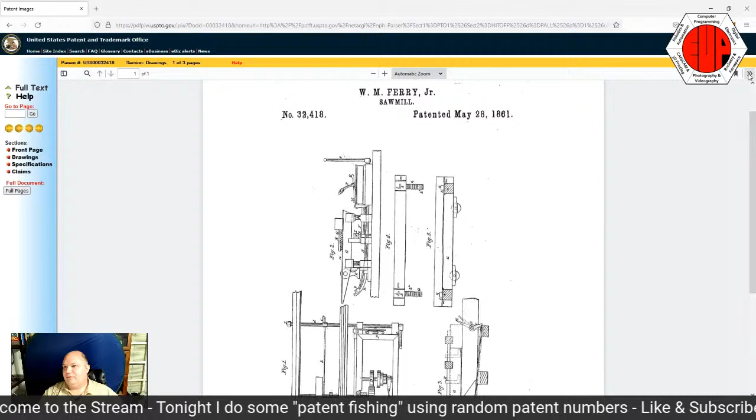Ooh, a sawmill. It's a little crooked. Got some belts with variable speeds, pulleys down here. All right, well, it's a sawmill, but let's go see what the actual claims are. So obviously, he wasn't the first to patent a sawmill in 1861.

Let's see here. Throw on the highlighter. William M. Ferry Jr. of Ferrysburg. I wonder if he owned the place. Useful improvement in sawmills. Plan of the sawmill with my improvements applied to it. A head and end view, longitudinal view.

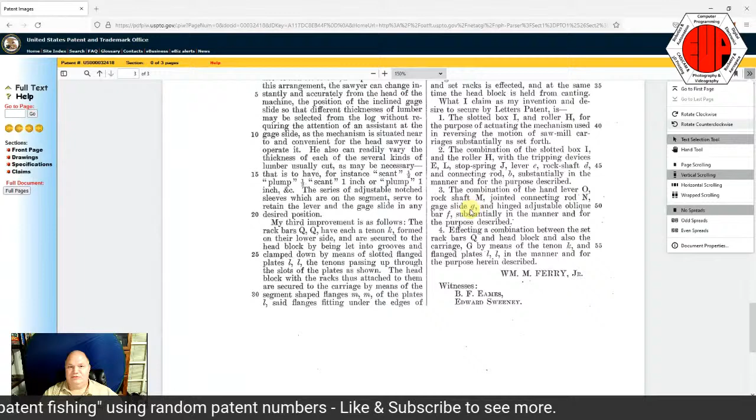So this is generally the long-winded explanation of the diagram or diagrams. And sometimes that's fun to look through, but usually the meat of the matter is down here at the bottom, the actual claims. So these are the things that he claims are unique to his patent. The slotted box and the roller for the purpose of actuating the mechanism used in reversing the motion of the sawmill.

Well, I mean, first reversible sawmill, that's what he's claiming. Hand lever this, jointed thing that. If we find something small enough that we can take the patent design of, clearly long out of patent, we might do a 3D printed version, but this looks a little complicated for making a 3D printed version.

All right, well, moving on. Let's see, patent number 485-510. Boop-a-doop-a-doo.

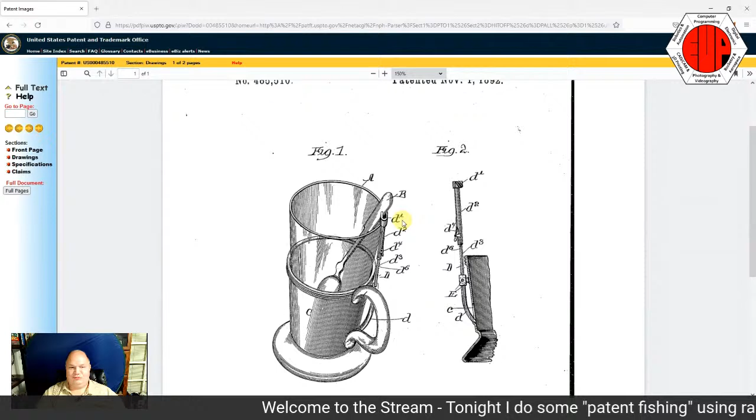All right, a spoon holding attachment. That's right, just in case your spoons were falling into your cups too often. Here's a way to attach your spoon to your cup. How convenient.

Let's see here. Be it known that Joseph so and such, a citizen of the U.S. and so on, as the following specification, invented a certain new and useful improvements in spoon holding. Who knew that there were old and not so useful improvements in spoon holding? But that's pretty much the standard language for all of these.

Oh yeah, more especially at soda water fountains and similar places where a spoon is often used to serving different drinks. That makes a little more sense. Commercial spoon holder. Illustrated in the drawing based on the two figures. Oh well, this is pretty small, one-page patent.

Combination of the holder C, a lateral arm D, extending upward there from sufficiently to reach the top of the glass and terminating an overhanging fork D prime. Open laterally in a position to receive a spoon as it slides along the interior of the glass, so substantially as described.

So pretty much just this little add-on piece here. And it's got some sort of clamping mechanism, if you will, to hold on to the spoon. It looks like a little spring-loaded clamp. Well, I guess that was a problem for soda water back in 1892.

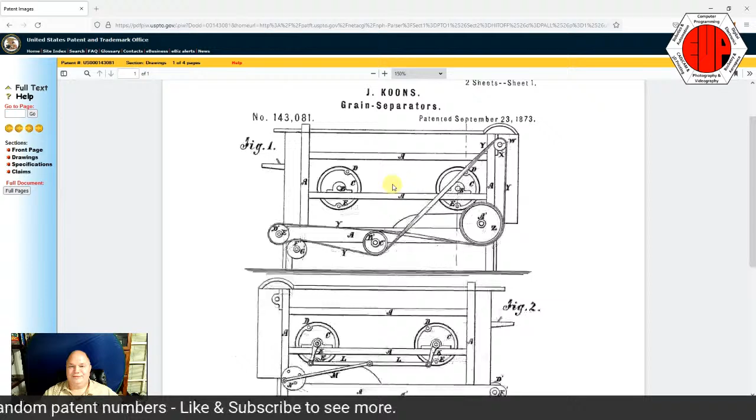Moving on. Patent 143-081. You never know what you're going to find, folks. Grain separators. So a mechanical system of separating grains in case you accidentally got them mixed up. Let's see, or is it the wheat from the chaff kind of separator? There's a little control lever.

Various platforms. All right, let's see. Joseph Koons of New Auburn in the county of Sibley, state of Minnesota. Oscillating grain separator. Arrangement of the belt and pulleys, driving the various parts. Similar letters of reference indicate corresponding parts.

If I had a purpose for separating grain, I might try and build one of these, but I don't. Let's see. Where's his claim start? So if you get an old enough patent, the claims aren't in the same place. It's not the same layout. Looks like 1873. It's not.

Ratio between the horizontal and vertical movements of the rack and connector may be regulated at will. This adjustment enables the forward movement of the straw to be accelerated and retarded as required. A rack having the movement herein described may be used in connection with an endless canvas apron.

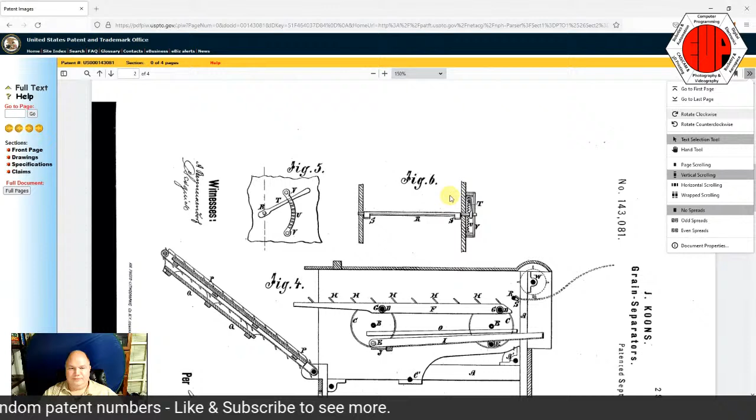All right, just a little. Turn this clockwise here. Looks like you feed everything in one way, and these shake and vibrate to produce two different outputs. Alrighty, moving on.

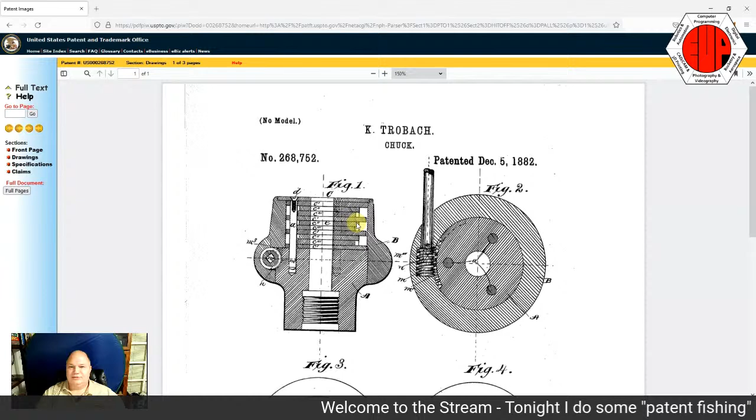A chuck. Hey, chuck. Is that a 3-jaw chuck for a lathe? Interesting little lobe shapes you got here. Kind of pinch in the item.

All right, let's see what the claim is. Oh, looky here. Konrad Trobach, subject of the King of Prussia and German Emperor, residing in Berlin. Although this is the U.S. Patent Office, anyone from all over the world can file a patent. Improvements in chucks to be used in lathes, boring, or similar machines for holding and gripping pieces of work and other purposes, with the accompanying drawings.

Yeah, it does look like a head of the block, having 3 or more recesses for the reception of a corresponding number of tightly fitted guide pins. The worm catches on the worm teeth, and the corresponding hole in the ring B. So yeah, lever plates. So it looks pretty much like that.

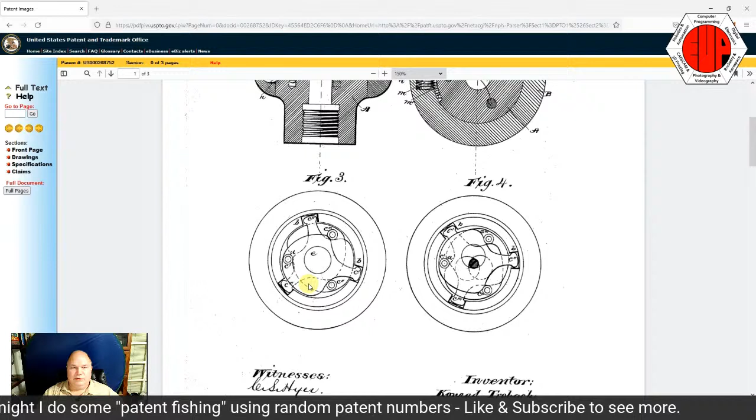So this worm interacts with the worm gear here, rotating the intersection, and by rotating these various lobes, you get sort of a neck tightening action on the center there, as each one of these are moved from this position, the open position, to the closed position. You know, I suppose this doesn't look like it.

It does have a little bit of a flaw here, because depending on the circumference of the hole in your lobes and the circumference of the thing you're trying to hold, you're really only contacting the thing you're holding by a very small surface where these circles are tangent to each other.

See if it's 3, or it actually looks like it could be a whole number of plates. 3, 6, 9 plates. With that many plates, you might actually get a decent grip. Interesting little way of locking it up sideways. All right, there's your lathe chuck. Moving on.

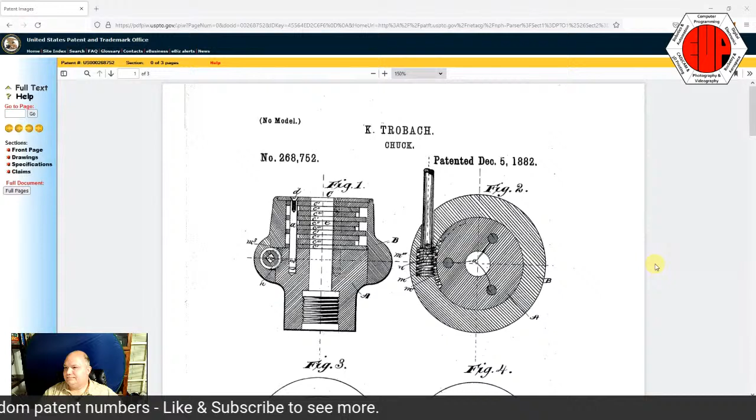Talking to myself. Just talking to myself. It's a little bit weird.

Here we go. Patent number 824058, a condiment holder. All right.

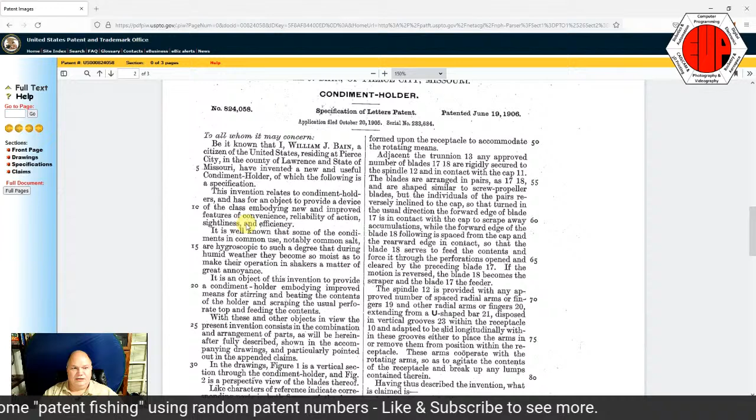Full pages. William J. Bain of the U.S. New and useful condiment holder. Condiment holders, and is for an object-provided device of the class embodying new and improved features for convenience, reliability of action, sightliness, whatever, and efficiency.

Improved means for stirring and beating the contents of the holder and scraping the usual perforate top and feeding the contents. All right, well that kind of makes sense. You got a number of little bars that twist. Oh, there's the hand crank. Missed that earlier.

Yeah, turn the hand crank, keeps all your salt. This actually might be something we could print. I don't know how terribly useful it is, but let's set this one aside and see if we can print one. It doesn't show what it looks like from above, but I'm assuming it's a cylinder, and we can probably use these images to bring them into CAD.

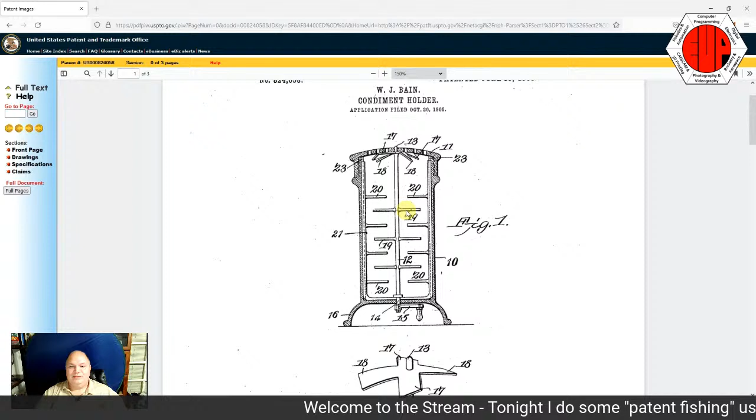So that looks more like a fan now than a cutting blade. He has all sorts of specific details as to all of that. Let's—which one's this? Let's keep this one aside. 824.058.

Just putting a note down real quick.

Condiment holder - what is it called? Yeah, condiment holder. Well, that one's printable.

It's not really clear whether these are just bars or plates. I think they're just bars because I'd imagine it's meant to keep it stirred. And how many of them, if we were looking down from above, would there be two others sticking out the other way? Let's see, they're 19 and 20.

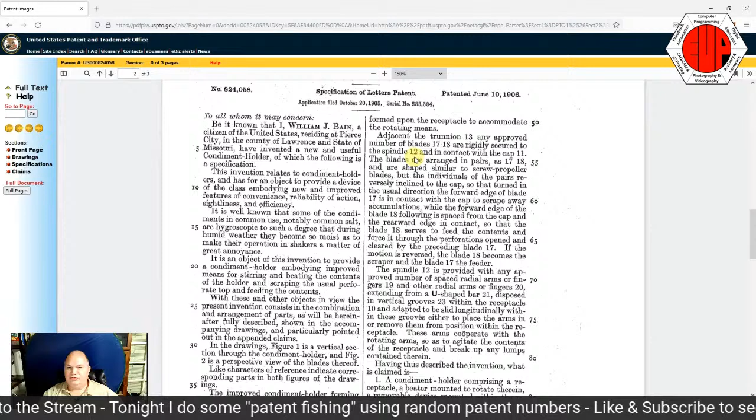Adjacent the trunnion 13, for any approved number of blades, 17 and 18, rigidly secured to the spindle 12 and in contact with the cap 11. Blades are arranged in pairs as in 17, 18. Oh, these are those blades. So whether you need 4, 2, 6, he's trying to cover his bases.

Similarly shaped screw propeller blades, but individuals of the pairs reversely inclined to the cap so as to be turned in the usual direction. Forward edge of blade 17 comes in contact with the cap to scrape away accumulations, while the forward edge of blade 18 following is spaced from the cap and the rearward edge in contact, so that blade 18 serves to feed the contents and force it through the perforation. So that's what he thought was all sort of unique.

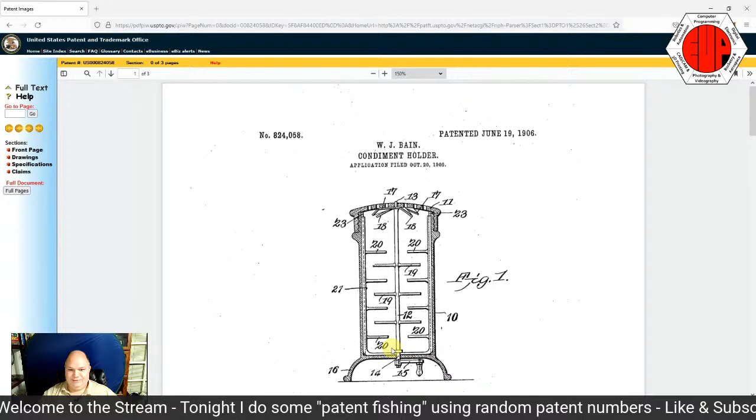So while this edge is scraping, these edges are pulling stuff in, almost like a pump I guess. Yeah, we'll save that one. Maybe we'll make that one. That one doesn't look too difficult. And we're moving on.

Obviously these patents are all old, and I chose that range because the mechanical ones are much more interesting to look at than the computer or electronic ones. Variable speed transmission gearing.

There's a valve mechanism for the piston. All right, variable speed transmission gearing, Mr. Thomas Churchill, subject of the King of Great Britain.

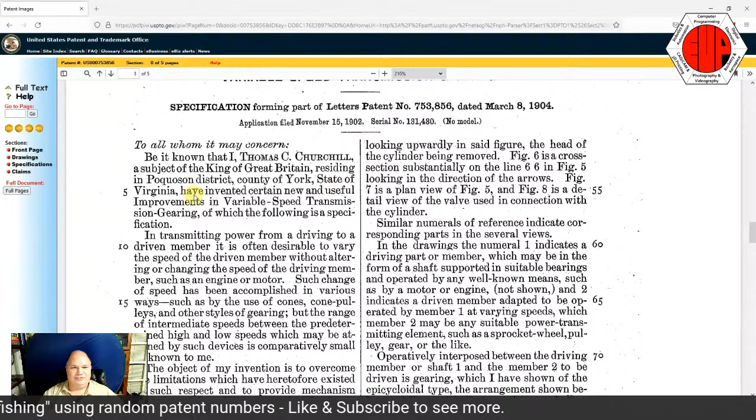Subject of Great Britain. How old is this? 1904. So he's a subject of Great Britain, but he's living in the state of Virginia. Certain new and useful improvements in variable speed transmission gearing, of which the following is the specification.

Various gears and shafts and keys and so forth, collars. Where's your claims? What's your actual claim here? Oh yeah, this is a long one, it's got pages. Here we go.

From the foregoing it will be apparent that by opening and closing valve 24 more or less, the speed of rotation of member 2 may be readily controlled, said member being at rest when the valve is fully opened, and full speed when it's closed, rotating at any desired intermediate speed controlled by the reciprocations of piston 7, consequent to resistance to the rotation of gear 4. So yeah, looks pretty complicated.

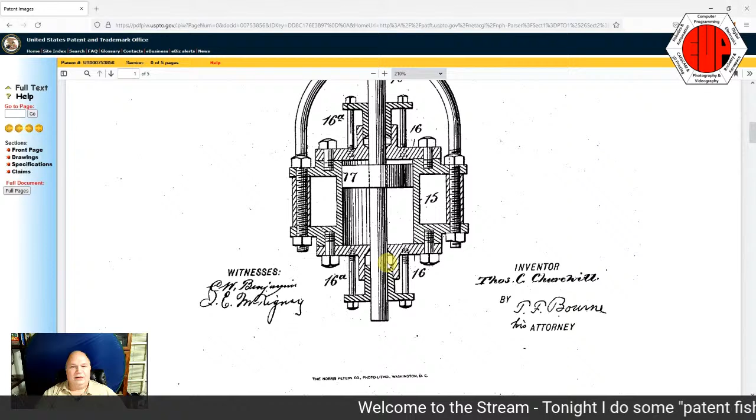So this controls... interesting. So the idea is that your pulley - this is again cross-section - this is turning towards us, and that's causing this part to go up and down, piston to go up and down. And the amount at which the air is allowed to travel from one side of the piston to the other creates resistance and thereby slows down the speed of the wheel.

Basically just burn off the energy. Sure, you get a slower speed, but you've also wasted a bunch of energy by turning air into heat. Simple enough idea though - nice continuous amount of adjustment with no significant gearing. Might be interesting to make that, just for giggles, though I don't know what I'd use it on. Moving on.

Oh no, they're going to demonetize me for singing a song.

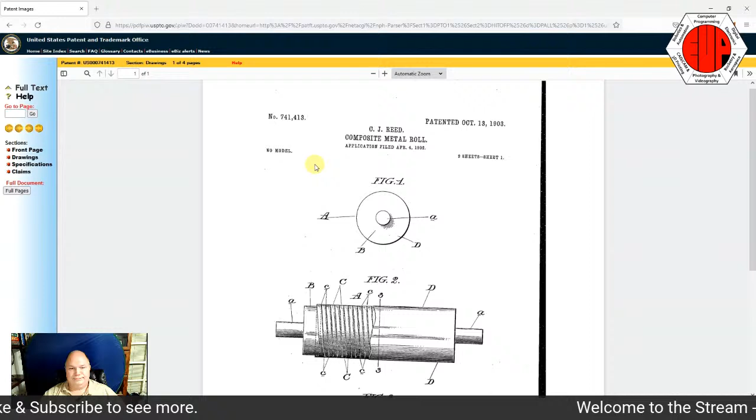Composite metal roll. Well, that's boring. Come on. Yeah, okay, it's a roll made with different types of metal and thus is a composite. Not terribly interesting.

Let's see what we got here. Looking good so far. Let's see. Oh Jesus, taking forever. All right, yeah, it's behaving.

And I just got to make sure things are going. Moving on - composite metal roll, you're boring, Mr. CJ Reed. Where are you from though? Let's just, for giggles, let's see where Mr. Reed is from. Philadelphia.

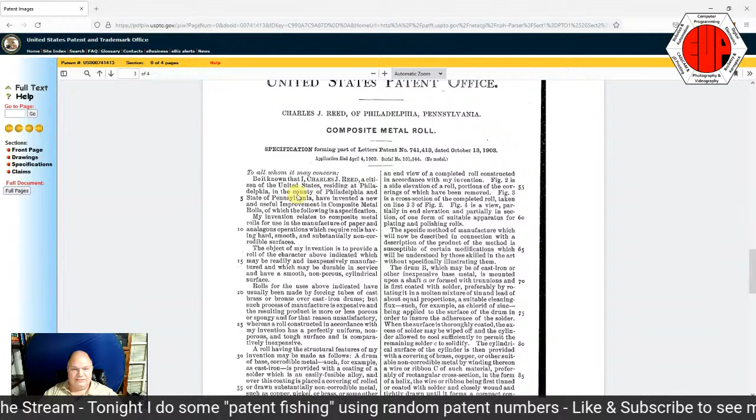A new and useful improvement in composite metal rolls. Ooh, sexy, sexy stuff. Indicated here, usually been made by forcing tubes of cast brass or bronze over cast iron drums, but such a process is expensive and the resulting product is more or less porous or spongy. Yeah, that's the last thing you want out of your metal rolls is being porous and spongy, I gotta tell you.

Moving on. Doodly-dee, here we go, what could it be? Patent from 1911, 997,195 - two-cycle gas engine. Well, that's interestingly different. Mr. C.F. Jenkins, two-cycle gas engine. Looks like a pretty complicated piston, various gas ports, got yourself a spark plug.

Jenkins of Washington, District of Columbia. Certain new and useful improvements to the 2-cycle gas engine.

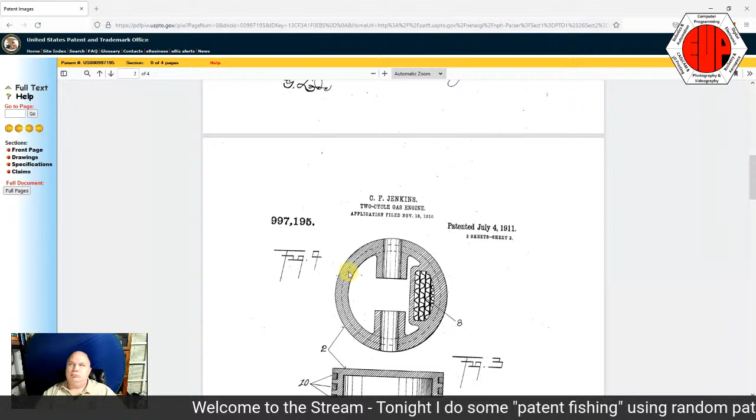A 2-cycle engine, by comparison, draws in all the gas. It draws in the gas, and while it's drawing in the gas, it's also exhausting whatever may already be in there. Then it's going to compress that gas, and it explodes, and the explosion is pushing the piston down. It actually evacuates the cylinders and also draws in more fuel, so they're less efficient.

And these are typically the engines that you would have to add oil to the gas to keep them lubricated. They're inefficient in gas usage, but they're efficient in design, in the sense that they're much more simple to build. In a lot of cases, as it looks like here, there's no actual valve train, so you don't have a separate cam opening and closing valves. The valves are open and closed based off of the position of the piston.

So this looks like the exhaust port here. And so once the piston is pushed down in the power stroke, the exhaust is allowed to escape. And actually, it looks like right in this area of the piston. Yeah, so in any case...

2-cycle engine. Let's see what his actual claims are as to what his improvements are.

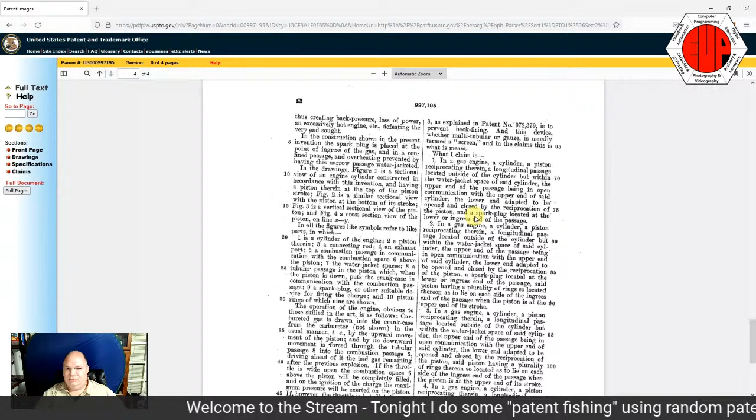Claim 1. In a gas engine, a cylinder, a piston reciprocating therein, a longitudinal passage located outside the cylinder but within the water jacket. Upper end of the passage being open communication with the upper end of said cylinder, the lower end adapted to be opened and closed by the reciprocation of the piston, and a spark plug located at the lower end or ingress end of the passage.

And then this is the way claims go. First I claimed it was a gas engine, a cylinder, and a piston reciprocating therein. Now it's in a gas engine, a cylinder, a piston reciprocating therein, a longitudinal, everything I said before in claim 1. Pretty much. Let's see, where does it become different?

Said piston having a plurality of rings so located thereupon as to lie on each side of the ingress end of the passage when the piston is at the upper end of its stroke. So basically what he claims is a 2-cycle engine with a piston designed thusly, with the holes thusly. Now all of that, but with rings, such that one set is above the ingress air and another set is below the output air, the exhaust, etc.

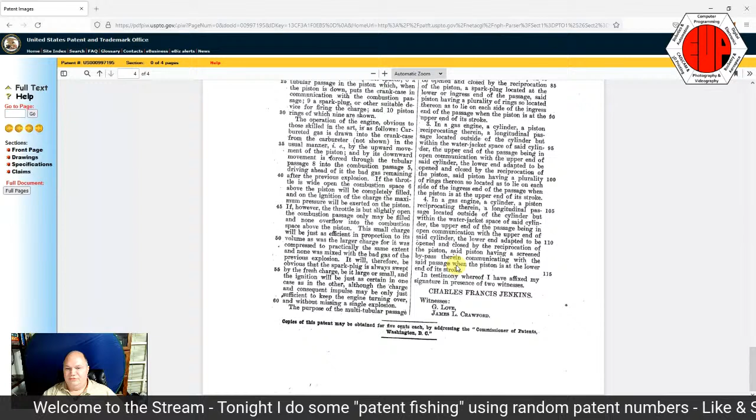So it gets a little repetitive in a lot of the claims, since they sort of restate what the first claim is in each one. So even here, claim 4: in a gas engine, a cylinder, a piston reciprocating therein, and so on and so forth, and so on and so forth. A screened bypass therein communicating with the said passage, with the piston in the lower end of its stroke.

Okay, well, he made a new gas engine with no valving. It might be useful. Not something I can build on a 3D printer, but let's keep going.

Moving on. Oh, not page number. We never know what we're gonna get. Doodly-dee. Ooh.

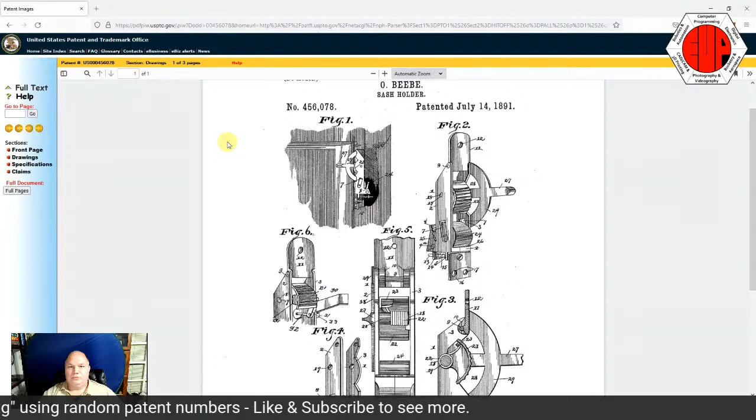A sash holder. As in a window sash. Well, that looks awful complicated for holding the window sash up.

Let's see. Sash holder. Mr. Oscar Beebe, citizen of the U.S., state of New York, new and useful sash lock and holder, of which the following is a specification.

Lock and holder, fairly simple. Other objects and advantages of the invention will appear in the following description, and novel features thereof will be particularly pointed out in the claims. Yeah, that's pretty much what you do in a patent.

See, look through a few dozen of these and you'll see quite the pattern. So, skipping on down to the claims.

Claim 1. The herein described combined sash lock and holder consisting of an oblong housing terminating at its lower end with a seat and having its opposite sidewalls provided with inclined slots and a roller seated at the seat and having trunnions, again with the trunnions, extending into the slots, and shafts and so forth, segmented cam, so forth and so forth, coiled spring, segmented shaft.

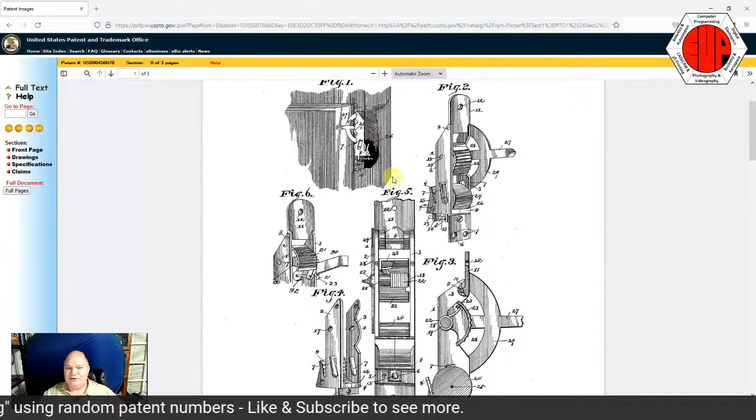So basically what it looks like is we have this sort of pushed-out mechanism, built into the wall. By turning this lever, you extend this friction brake out against the sash, and that helps hold it up.

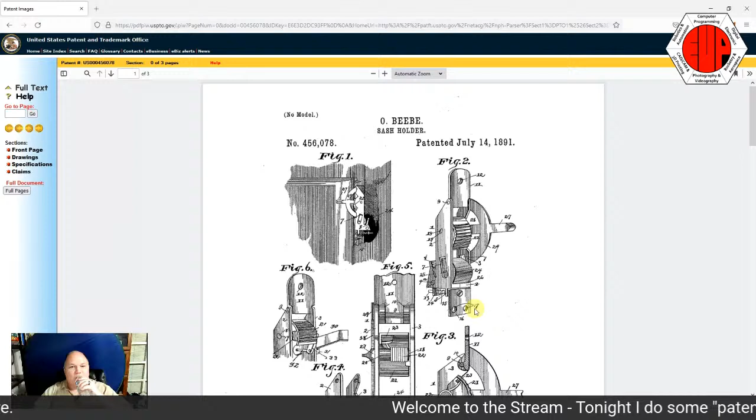Well, I remember in our old house we had really long lead weights, maybe twice as long as this water bottle, though it's probably bigger in my memory. They were lead weights inside little pockets on the side of the window, so when you lifted the window it was counterweighted with a rope and pulley, which seems a lot easier than this complicated mechanism. So anyway, moving on.

Doodly-dee, let's see what we can find next. I gotta come up with a new song in my head. A saw swag. Saw swag? Swedge?

Let's see, we got some ratcheting teeth here. Got a little handle. Oh no, not ratcheting teeth, that's the saw blade. Let's see, looks like it would go on the saw blade. Is this to alternate the teeth a little, or sharpen them? I'm not particularly sure, let's see.

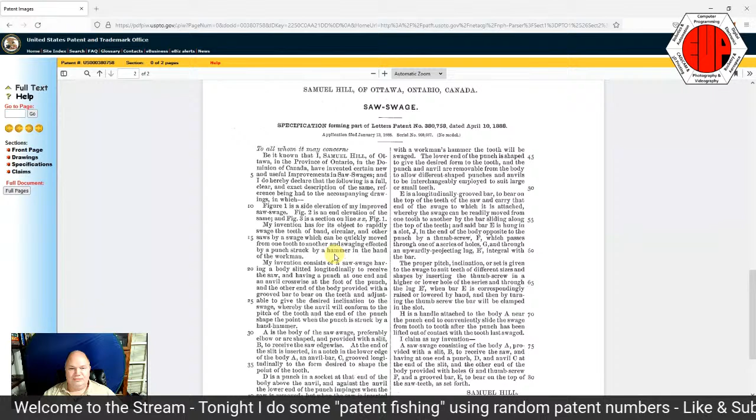Full document: Samuel Hill of Ontario, Dominion of Canada. Certain new and useful inventions, saw swage. Following full and clear disclosure, side elevation of improved saw swage. My invention has an objective to rapidly swage the teeth of band, circular, and other saws, can be quickly moved from one tooth to the other. Swaging is effected by a punch struck by a hammer, in the hand of the workman.

Alright, so like I thought, the swagging is where every alternating tooth, instead of having all your teeth lined up on your saw, you have them a little bit offset like this. That way they carve out some space so the rest of the blade can move through the gap. This doesn't look particularly useful, I guess it helps keep everything lined up. So you just lift it up, move to the next one, smack it with a hammer, move to the next one, smack it with a hammer, and it seems to automatically alternate between directions, I think. I don't know, let's look up the term: a saw, S-W-A-G-E.

Alrighty, well here's some alternates, here's some swaging machines, hand swaging tool - I'm probably saying that horribly wrong. I should probably also look for a definition. At Merriam-Webster's: tool for metalworkers, shaping their work by holding it and striking it with a hammer. Okay.

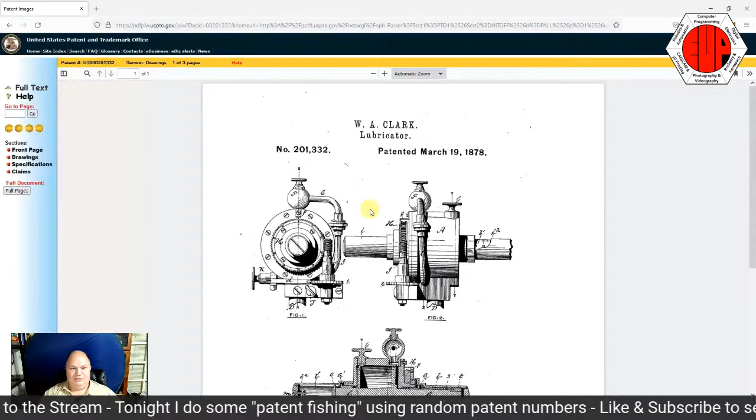Here we go, 1878. Oh, that looks like a lubricator. Now that's a complicated lubricator, all sorts of empty segments and pistons and such. See here.

Improvement in lubricators, from Mr. Clark of New Haven, Connecticut. Object of my invention is to provide apparatus which will be applicable to all locomotives - lots of locomotive patents, as you can imagine - to supply that portion of the machine which is to be oiled, as for example the valves and the cylinders, a prescribed amount of oil per mile for every mile run by the locomotive, or to a stationary or marine engine, a prescribed quantity for every stroke of the piston. Oh, ain't that convenient - automatic.

So you can see we got some rotational gear here going on, that's turning said worm, which rotates the valve, open and close, looks like. Yeah, alright, not much steam engine going on today. We'll move on.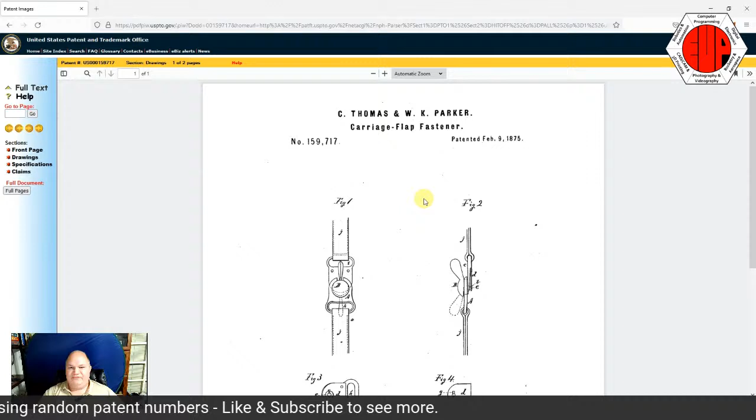A carriage flap fastener. Gotta fasten those carriage flaps. Nice little, what do you call these things? Wing nut looking shape. This sort of keys two bits of belt buckle together.

Well, that might be printable. A little, doesn't really show the back side thing. Oh, maybe let's check the rest of the pages. Maybe there's a diagram of the back here. Nope. Out of luck.

So it looks like this butterfly or wing nut type portion is bound to the back piece here, and this piece kind of slides in, and then you rotate the wing nut to lock. All right.

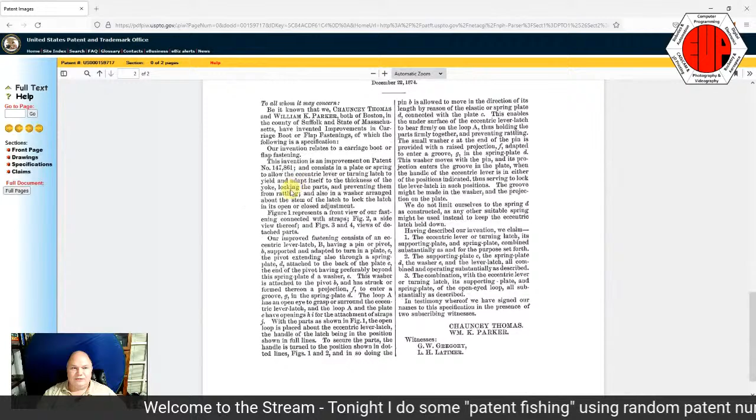Improvement and patent number this. Well, what do you know? Our first improvement patent. Plate or spring to allow the eccentric lever or turning latch to yield and adapt itself to the thickness of the yoke, locking the parts, preventing them from rattling.

Oh, God. Can you imagine riding on the wagon and going, my carriage, oh my, if only the carriage flaps weren't rattling so much. I must invent something.

So there you go, keep those carriage flaps from rattling. Oh, it might be buildable. I don't know what I'd use it for, but it looks like you can use it for some sort of belt strap or locking mechanism.

I'll have to take a little closer detail here. And that's all so that these clamp together tightly and don't rattle. Huh, all right.

Moving on, let's go ahead and save this one. That might be printable.

Carriage flap fastener. Scintillating content we're creating today. New and unique and never before seen.

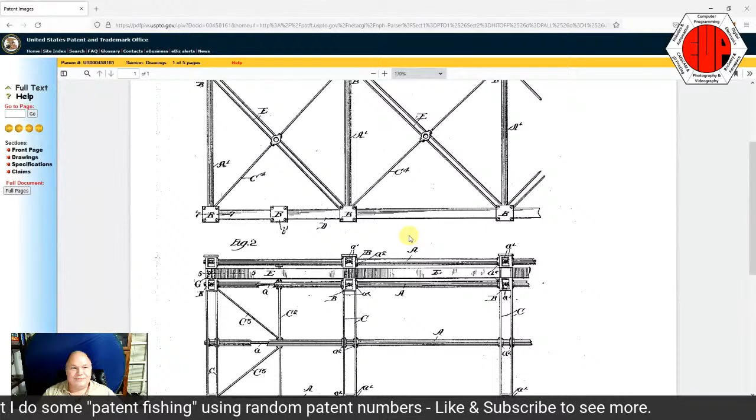Take a look at the bridge concept here. I think I might have been over one of these. We got some rigid portions here, some what look like turnbuckle cables. How all the cables, or posts, are combined together. A little bit more detail on the connections.

A bridge Mr. Green has invented of Chicago, state of Illinois. New and useful improvement in bridges, of which the following is a specification. Reduce the weight and cost of bridges as much as possible without lessening their strength and durability. Well, of course we do. Who wants a heavy bridge?

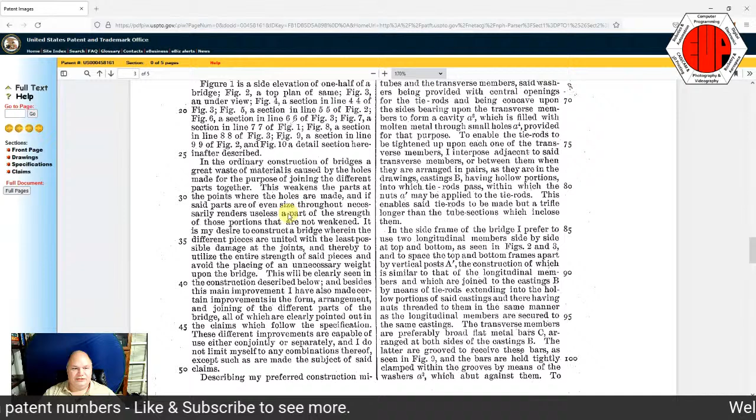Side elevation of half the bridge. Ordinary construction of bridges: great waste of material caused by the holes made for the purpose of joining the different parts together. This weakens the parts where the holes are made.

Different joins. My preferred construction. Minutely and in detail from the drawings, applying a reference letter to each part throughout, as they generally do.

Let's see, here's their claims. All right, in a framework of the class described, a combination of a series of tubes, a series of hollow blocks arranged between the ends, nuts and bolts. Framework of the class defined, diagonal straining rods.

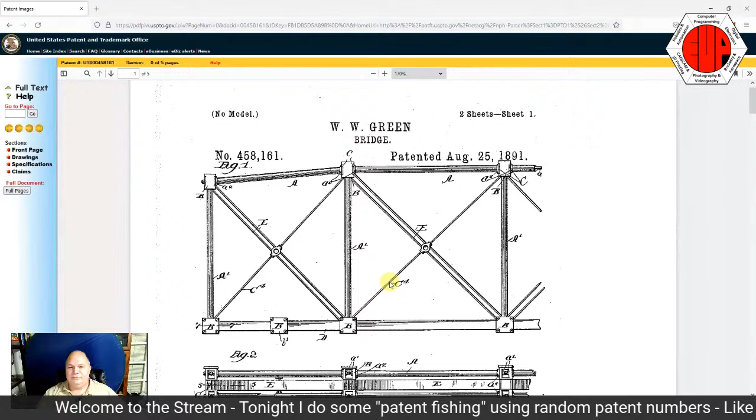Oh, so they're rods, not cables. Yes, and generally speaking, most metal materials are strongest in tensile strength when you're pulling on the material. Obviously metal's usually fairly easy to bend. So if you can arrange your system where the stresses are, as we see here, in pulling on the rods rather than bending the rods, you can make the rods fairly thin.

Yeah, I think I've been across a bridge that looks something like this. All right, moving on.

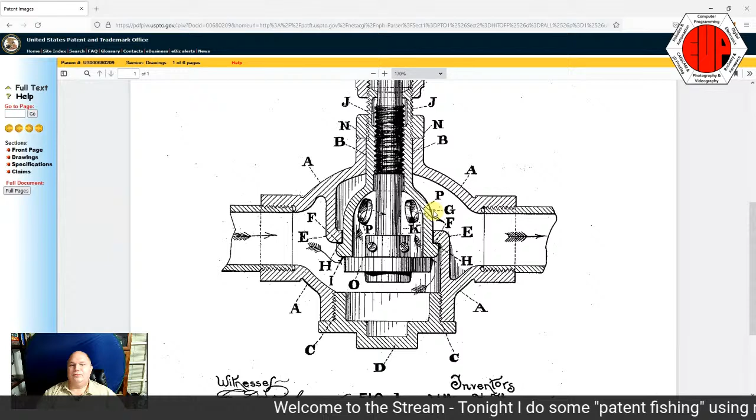So lots of detail to the valve. You can see inlet here, goes up. Where's the path through here? And through the holes, and out through there. That's all. Seems like an awful complicated bypass passageway through the valve mechanism.

See if they got another angle on it. That's a little cleaner. Looks like it's a valve designed for being able to open it very small, minute amounts, would be indicated on the wheel here. Otherwise the internals look much like most other gate valves I've seen.

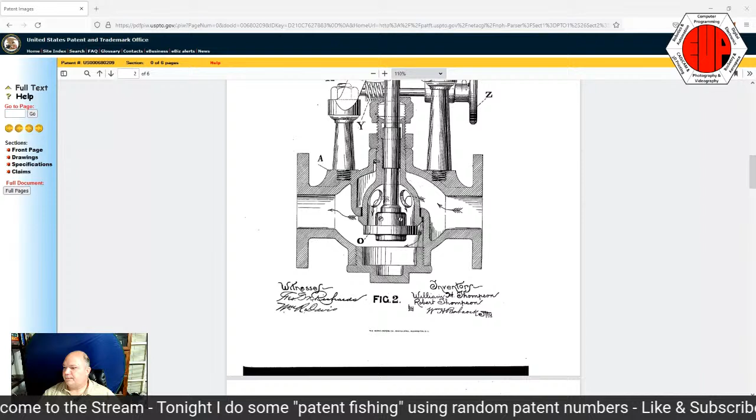Moving on. Oh well, we didn't even read anything about the valve. Again, big wheel. All right, let's see.

William Henry Thompson, citizen of Great Britain. Company drawings, vertical slide elevation, so on and so forth. Similar letters refer to similar parts. Yes, yes, yes, where are your claims? What are you claiming? What's new and unique?

In a valve, combination of valve casing and valve cup seating. Said casing is perforated, valve cup bearing seatings. Yeah, hollow stem, so on and so forth. Screw threaded spindle. Let's see.

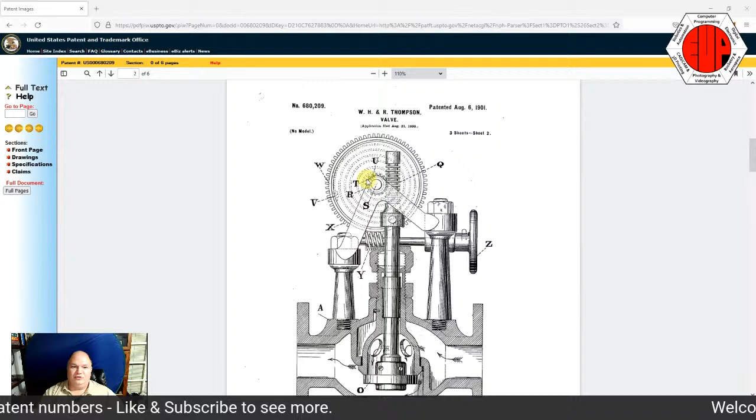I'm not sure exactly what he's patenting here as unique, but I can only imagine from the diagram that it's a small amount of adjustment afforded by turning the wheel this direction or that, which turns the worm, which turns this gear very slowly, in very small incremental amounts. And since you're gearing it down to this internal gear, you're making it even smaller, and that gear makes this piston go up or down.

That piston or stem is what's controlling the valve seat. Looks like it's designed so this could go all the way down, and this part would be seated down in this hollow. If that were the case, that would be the fully closed position. Not exactly sure, but in any case, I think the primary goal is the fine-tuning of how much the valve is open through this gearing mechanism. So we're going to go with that.

All right, moving on. Let's see what else we randomly get here.

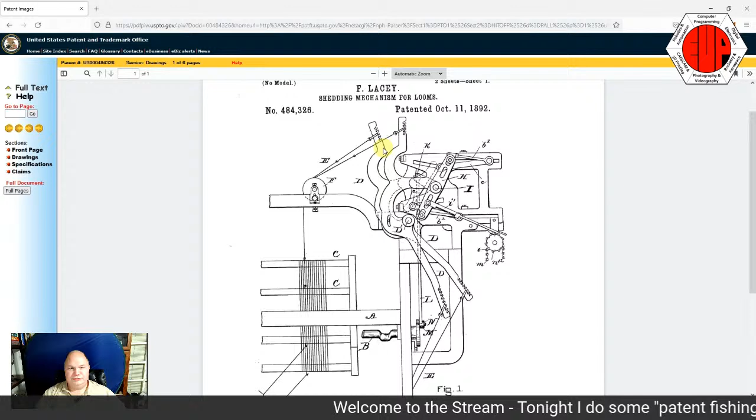Here it comes, you never know. 1892. Shedding mechanism for looms. So I'm weaving. Mr. F. Lacey makes a shedding mechanism for looms. Not sure what that terminology means in loom world, but looks like we got a spindle of thread here of some sort.

Lots of moving levers. See the full pages. Shedding mechanism, looks like it's card programmed. What's the original sort of, yeah, there we go. These are the cards, they go over this wheel. Holes or not holes decide which of these levers are pulled forward. Shedding mechanism, Fred Lacey of Massachusetts.

Shedding mechanism for looms, particularly in what are known as Dobbies. If anybody happens to see this one day and knows what any of this is, because I don't know looms and weaving all that much. I know warp and weft and that kind of stuff, but that's about it.

Let's see. In the first class mentioned, each shed in the warp is formed by moving warp threads out of the normal plane of the warp threads. Oh, okay, oh, the shed. Yeah, again. This is the actual mechanism that lifts one set of threads above the other so you can get one set of warp threads above another so you can put the weft through.

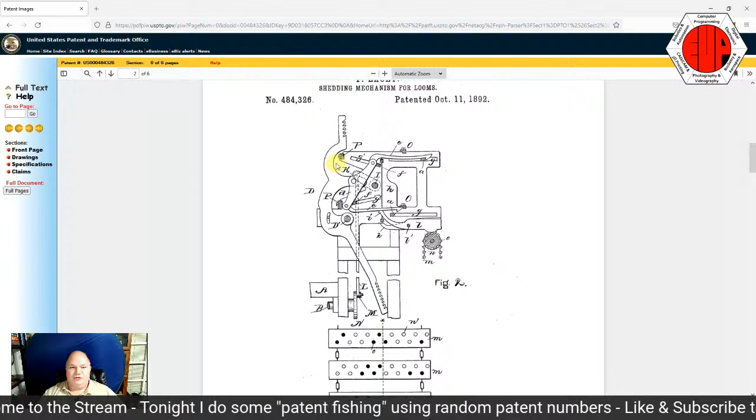So this is actually pretty much like the Babbage machine, where the cards and the holes in the cards, as played through - this is a side view - determine which warp threads are lifted. And this whole mechanism is one of several hundred, usually. Oh, that's pretty interesting.

So whether there's holes or not, this little lever goes up or down, and that would control this. There you go, there's that leveler, rotating here. Ah, yeah. And then I suppose, oh I see, I get it now, there we go.

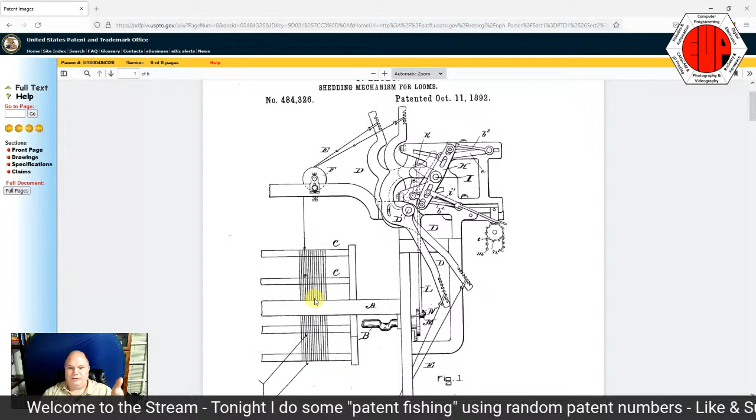A little confusing. This is the frame, these are the separators between the warp threads. And you are picking up individual frames of warp threads based on the programming on the cards here. So it'd be like a tartan pattern or something like that. This may not actually be a whole lot of levers, because you may only have 6, a dozen different frames, but the frames are the ones that control it all. So in the simplest world you'd have 2 frames for which warp threads you're lifting, alternating them, and you end up with the classic weave pattern. But by staggering them and threading differently, you can get all sorts of patterns.

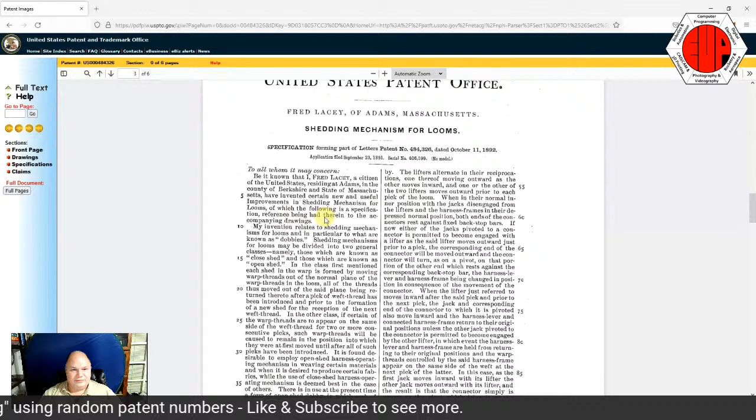1892, did he claim he was the originator of this? New and useful improvements in a shedding mechanism for looms. So not particularly new. Well, let's go check the claims. Wow, this is a longer one. Oh, he's only got 2 claims - all of that before was the description of how the mechanism works. So if you ever really get into looking at an old patent, it's best to print them out. It's a lot easier to have the diagram separate while looking at the description.

Harness frames, harness levers, and coordinating and connecting said harness frames with said harness levers. Hook jacks operatively connected to each other, said levers, etc. Indicating fingers for each harness to open the pattern bars. Doesn't really say if it's completely unique.

I mean, he kind of claims this aspect of it is unique, which I thought went all the way back to - maybe Babbage was 1892? Let's go double check.

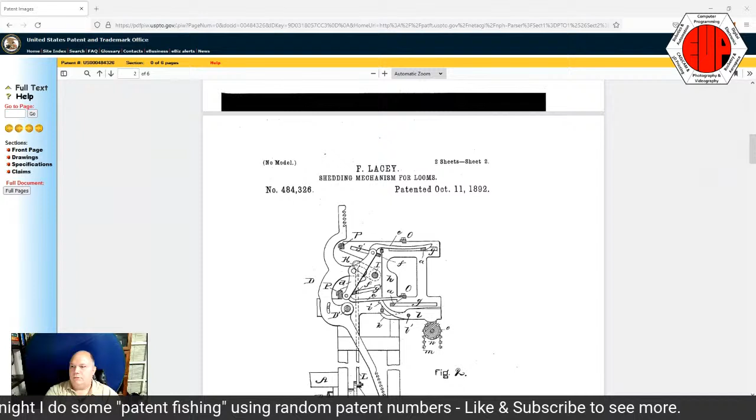Babbage loom. Charles Babbage and the loom, 1791, died 1871. So sure enough, there's her cards that determine which warp threads to lift, and all like that. Alrighty, cool.

Moving on. We're gonna save that one off just because it's interesting in the history of computing - Babbage and his machinery.

Let's see. All right, and our next guy. 607,766.

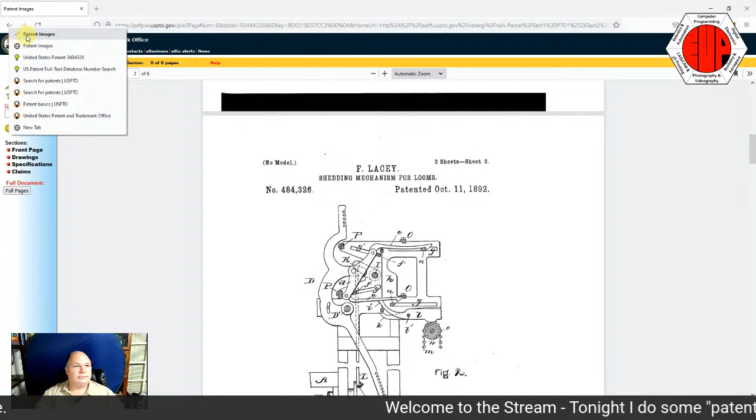Let's see. 1898. What are you going to say? Steam engine, household product, washing machine of some sort.

Let's see. It's a pen. Worse, it's a freaky looking pocket holder for pencils. A little bit of twisted metal, fits in your pocket, holds your pencil. Couldn't be much easier. Does it perhaps keep your pencil from staining your shirt, like a pocket protector?

Maybe. Let's see if it claims any protection from the pencil. Clay County, Illinois. Safety attachment for pockets, which the following is a full, clear, and exact description. Safety attachment whereby pencils, toothbrushes, books, spectacles, etc. may be held in place in the pocket of the wearer, consisting of the novel construction, combination, and arrangement of the parts herein shown.

A U-shaped pin. Lots of U-shaped pins here. All right, first claim: pencil holder constructed of a single piece of resilient wire bent into a U shape, its ends being bent into hooks to engage the upper edge of the pocket.

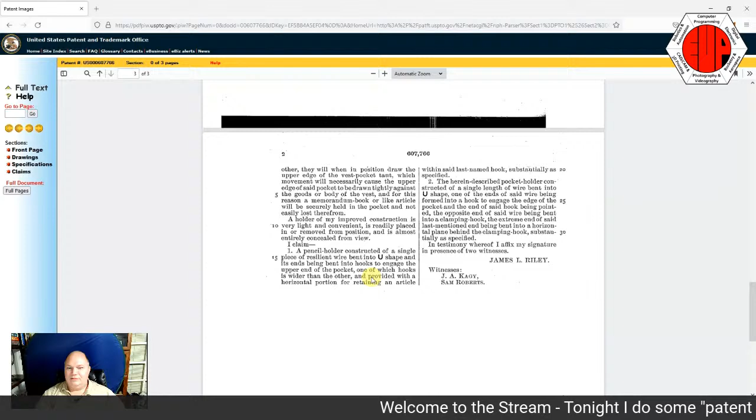Well, I think this could just be 3D printed. I think we could probably hand build this out of a piece of coat hanger or something. That'd be even simpler.

But no, it doesn't look like it's got anything to protect your pocket from your pencil. I'm not sure how it's a safety device. Oh, I know - because your pocket is on your vest or apron in the machine shop, and when you bend forward, if your pencil falls off into your lathe, it gets all chewed up and thrown in your face. So that's how this is a safety device - got to keep those pencils from popping out while you're using machinery.

All right, moving on. See if we come up with anything weird and nuclear or something. Not yet, not in the 1 millions though. I think the 1 millions were all back in early 1900s. This is 1900.

Got a lot of teeth. A pipe trimming and threading tool. So, a pipe cutting die. Thread cutting die, looks like. Pretty straightforward.

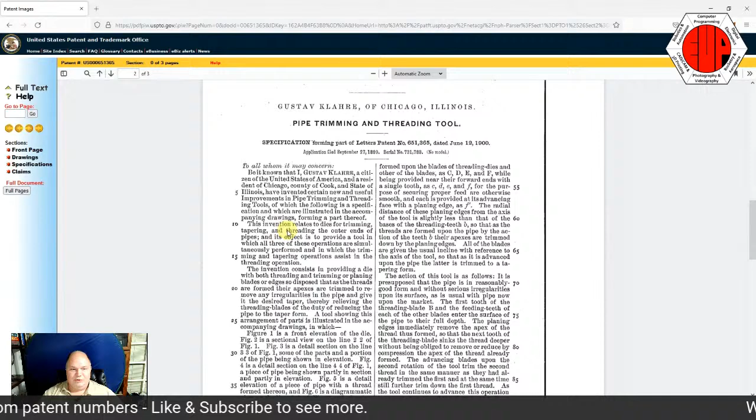See what he thinks is so super unique. Pipe trimming and threading tool. Relates to dies for trimming, tapering, and threading the ends of pipes, and its object is to provide a tool in which all three of these operations are simultaneously performed like never before - threading, trimming, and planing blades and edges disposed so that as threads are formed, their apexes are trimmed and irregularities removed. Well, never knew those were separate.

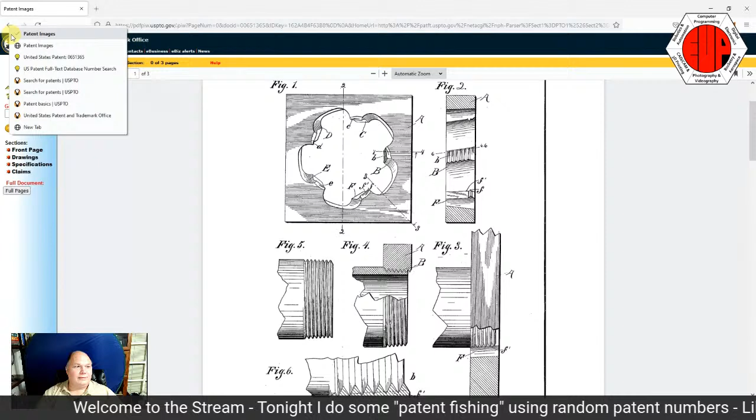So, moving on. 1906. Automatic fuel feeding furnace. Well, what do you know - it's an automatic fuel feeding furnace for all your automatic fuel feeding furnace needs.

We got a hopper, got some sort of conveyor belt looking thing. I don't know which end is which. Clearly that's the hopper end. Where's the feed end? That's a big furnace. A lot of these things for industrial purposes.

Ooh, that's fairly complicated. Matching gears on each side, keep everything moving. Citizen of Austria-Hungary residing in Budapest. Automatic fuel feeding furnace, for all your automatic fuel feeding furnace needs.

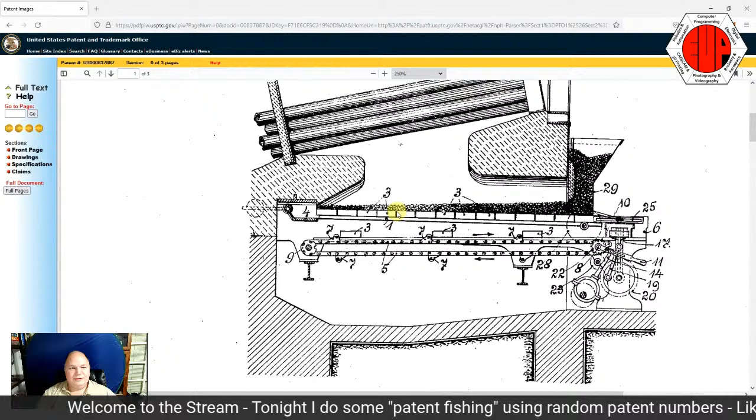Fire bridge, fire grates constructed as trolleys or sliding cradles, the grates on which the fuel has been consumed being returned onto the lower rack. All right, so feed in fuel up top, it gets pushed away and presumably burned to heat these pipes. And then the resultant is dropped down below, and that belt feeds it back out. Looks like it would feed it back out between the two sides, because all of the gearing is on the sides of the mechanism.

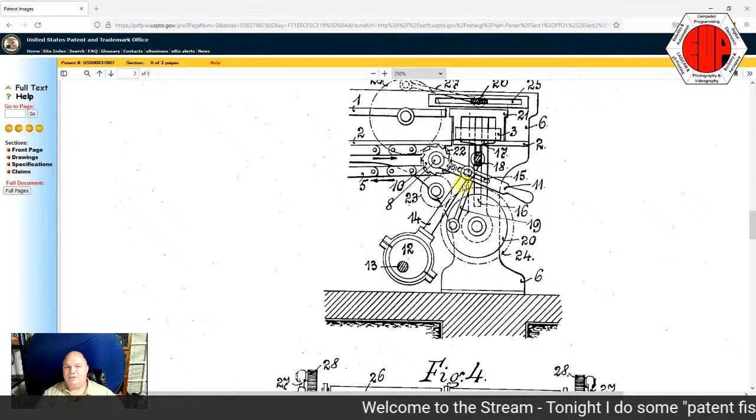Looks like we got a little hand control, as a clutch, something to that effect. It's an eccentric, it should be able to make - so the wheel turns, the eccentric turns, pulls this up and down, lets it ratchet so that it's a slow movement of the conveyor belt, letting the fuel burn and coming back, sort of ratcheting through. And then all that mechanism's on either side of the belt. All right, for all your automatic fuel feeding furnace needs.

And presumably that's where the firebox is. All right, moving on.

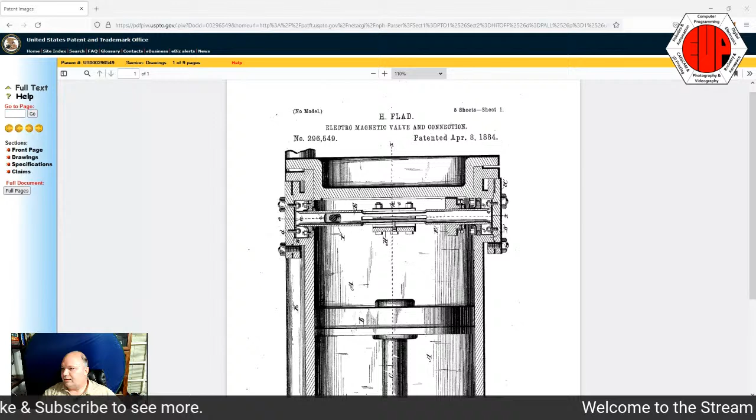An electromagnetic valve and connection. Ooh, electromagnetic. H. Flad. 1884 - didn't think there was that much electro back in 1884, but I guess so. Again, looks like a piston. Electromagnetic valve, it's something like a solenoid. Let's see what the full document would be. Complicated looking, looks like a big U-shaped magnet.

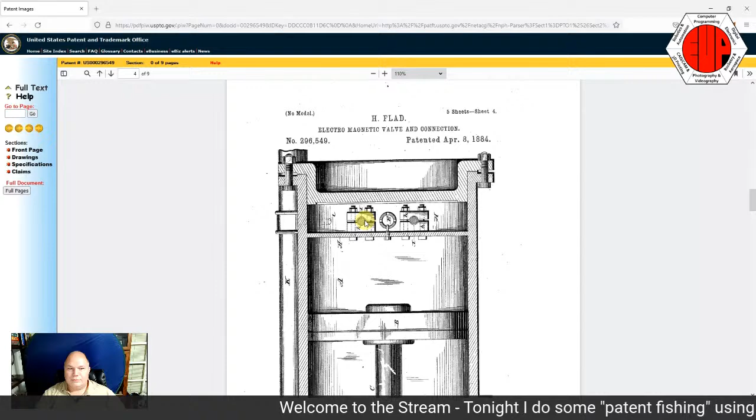Yeah, that does look like a U-shaped magnet. And presumably it would cause a rotation or a push-pull movement. One of the two.

Improvements in electromagnetic - well, first it's Mr. Flad of St. Louis. Electromagnetic valves and connections - I do hereby declare the following to be a full description. Electromagnetic valves and connections controlling air brakes on railroad cars. There we go, yet another air or train patent.

I wonder if this is the electromagnetic fail-safe, that if this electromagnet ever fails and is no longer energized, you actually end up closing the valve. So in case one train car breaks from another and this wire is broken, the brakes automatically go on, in case the train cars get decoupled. Let's see if that's his claim.

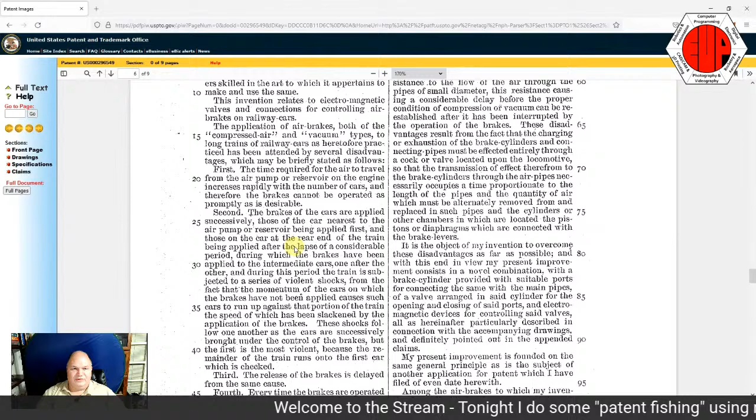Air brakes for both compressed and vacuum type. Long trains of railway cars are attended by several disadvantages. First, the time required for the air to travel from the air pump or reservoir on the engine increases rapidly with the number of cars. Well, that would be true. Brakes on the cars are applied successively, those nearest the air pump or reservoir being applied first, so you end up with this inchworm effect - the first car's brakes going on, then the next, and the next. And of course if your first car's brakes go on and the rest of your cars are still traveling down the track, well then all of the strain is on that one car's brakes.

So let's see - every time the brakes are operated, cylinders are required to be charged or exhausted. In the case of a vacuum brake system, let's see - making air supply pipes of very small diameter, the pumps and reservoirs of great capacity, attempts to attain prompt filling or exhaustion of the pipes whenever relevant. So it's really more of a way of synchronizing the brakes, it looks like.

To overcome these disadvantages as far as possible, and to this end, the view of my present improvements consists of a novel combination with a brake cylinder, provided with suitable ports connecting the same to the main pipes, and valves arranged in said cylinder for the opening and closing of said ports. The electromagnetic device for controlling said valves is hereinafter particularly described in connection with the accompanying drawings.

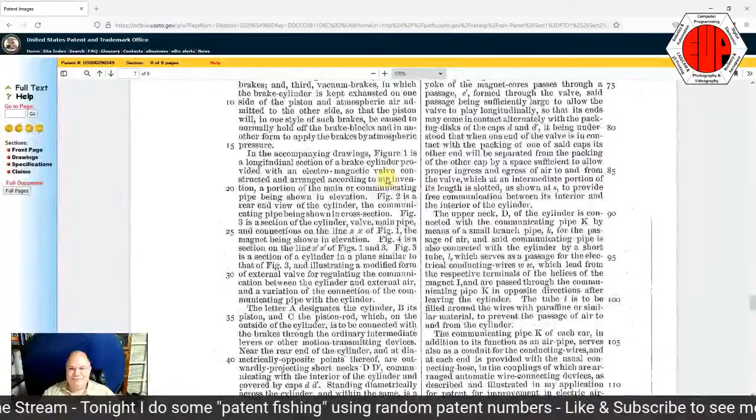Sounds like a super useful improvement in train braking systems. Let's get back to the top here. Yeah, looks like we have a fairly simple - actually, if this is the wire around your electromagnet, that's coming into this.

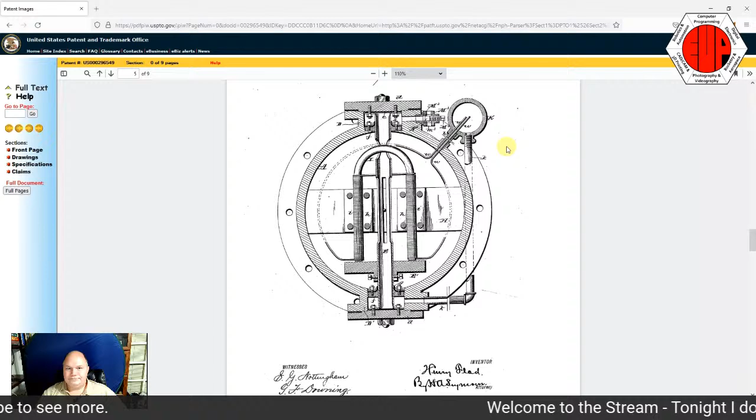Alrighty, moving on.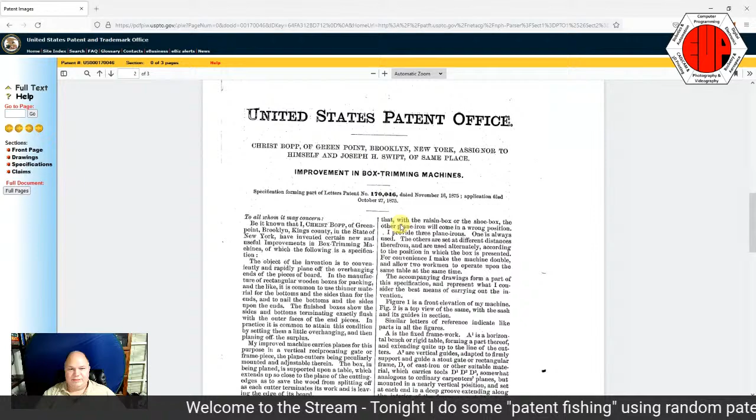Let's see. Greenpoint, Brooklyn, assigned to some other place or people. Box trimming machine. Conveniently and rapidly planing off the overhanging ends of the pieces of a board in the manufacture of rectangular wooden boxes for packaging and the like. So it really is just a gang of wood planes powered by an eccentric gear or a crank gear.

It looks like there's some weights applied as well. Yeah, eesh. Can you imagine this whole thing, just four planes going up and down in front of you? You're like, yeah, stick the board in. What was the year? 1875? Oof. Looks like one of those dangerous pre-OSHA devices.

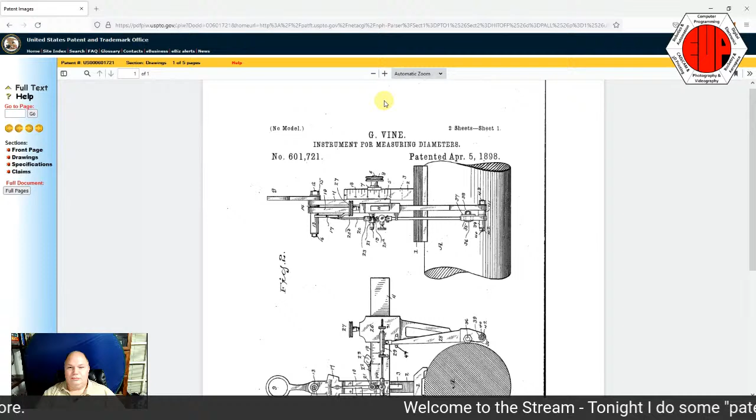Ooh, instrument for measuring diameters. I always needed to measure on a diameter, don't you? Let's pop this clockwise. So basically a set of calipers, but it looks like a set of heavy-duty calipers.

You can get some measurements off of the crossbar here. So that's a fixed crossbar, gets you on one side. Oh, I see, interesting. So basically what happens is that as you push the stock in between the jaws and it comes in contact with this base plate, the difference, or the unevenness I should say, between the distance from this plate to the center of the stock and these jaws to the center of stock are translated via these levers to this gauge that shows you when you've put the stock in exactly in the middle.

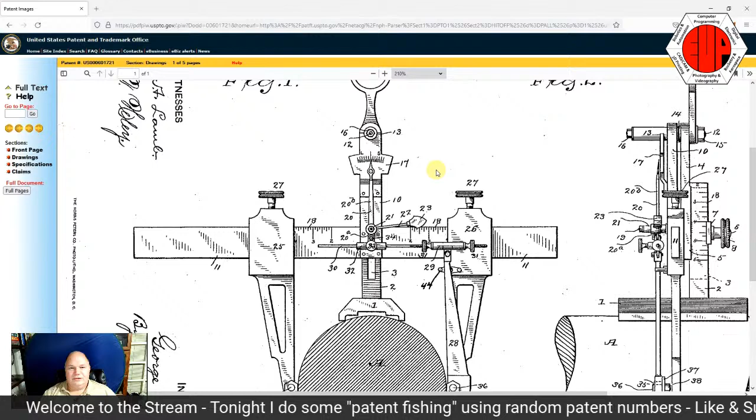So in other words, if the stock were further down, then this base plate would move down. That would cause these gears here to rotate, and you would get a deviation in this marker. So what you want to do is make sure the marker's in the middle, and once it is, you can read off your diameter from one side or the other of this gauge. Looks like it's meant to be showing a 4-inch diameter.

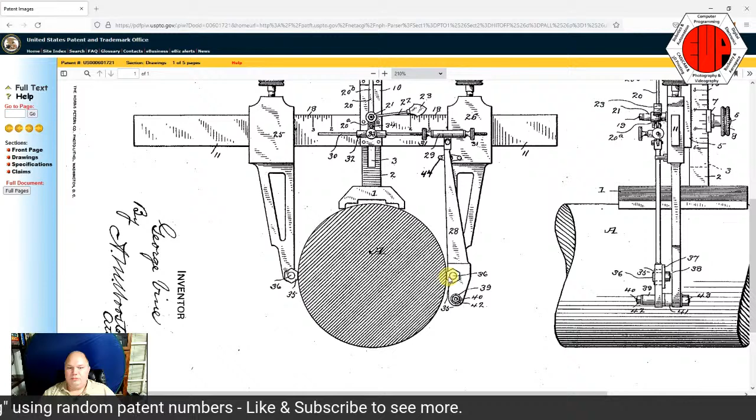Yeah, because there is kind of that issue, if you will, when you go to measure a round stock and you want to make sure you get the actual widest part — you want your jaws on the widest part of it. But again, make sure that the jaw distance to the center of the stock is the same as the center jaw, and that helps guarantee you've got it lined up properly.

Interesting little mechanism. Let's see the full documents. You call it an instrument for measuring diameters, with a little more detail to the center push bar and gears. So here he's showing, again, let's rotate it — rotate that, not my head. So here's what it looks like when you're off and your distances are incorrect. Looks like you're just not quite totally lined up.

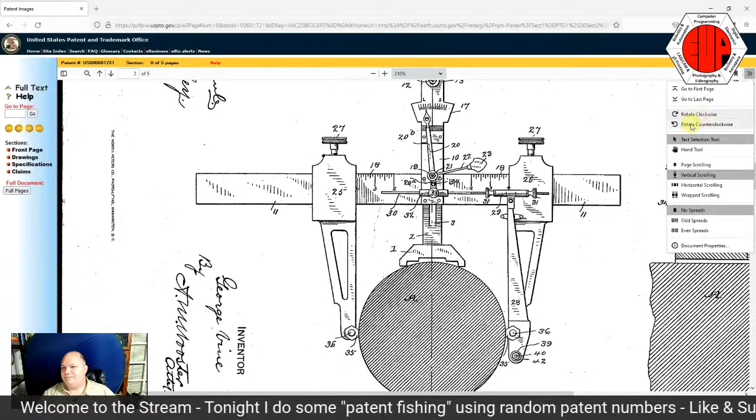Interesting, all right, well, let's see what your claims are. Mr. George Vine of New Haven, Connecticut. Measuring, i.e. detecting, the differences in the diameters of shafts, rolls, bearings, crank pins, etc., in short, and detecting whether a roll or bearing is in any way out of true. Yeah, well, there is that.

So finding the diameter is one thing, but the presumption is that it's a perfectly round item. And if it's out of round, then as you rotate your stock through this system of three jaws, you'll see some deviation. Well, that seems useful — make sure your round stock is round.

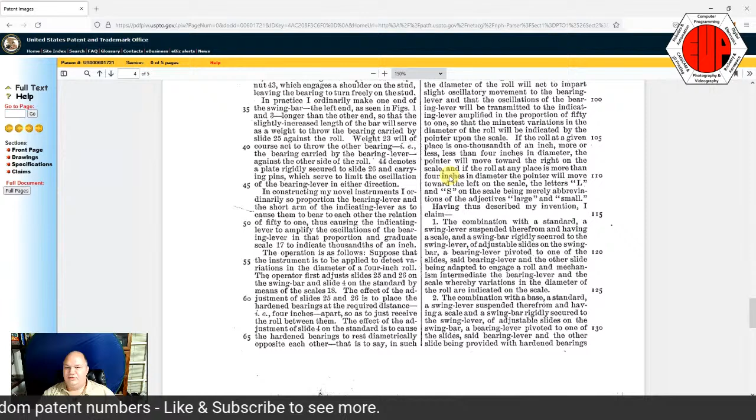Let's see. Claim the first is the combination with a standard and swing lever suspended therefrom, having a scale and a swing bar. So basically, if the roll at a given place is 1/1000th of an inch or more or less than 4 inches in diameter, the pointer will move toward the right on the scale, and if the roll at any place is more than 4 inches in diameter, the pointer will move toward the left on the scale. The L and S mean large and small. So that measures diameters, but also measures stock that's not totally round.

Bonus. I'm sure that was super useful at one time, and there's probably a version of this still around today. All right, moving on.

What do we got? 1902. It is a micrometer. Oof, that's an odd shaped one. I don't think I've seen a micrometer in that kind of shape. Let's see.

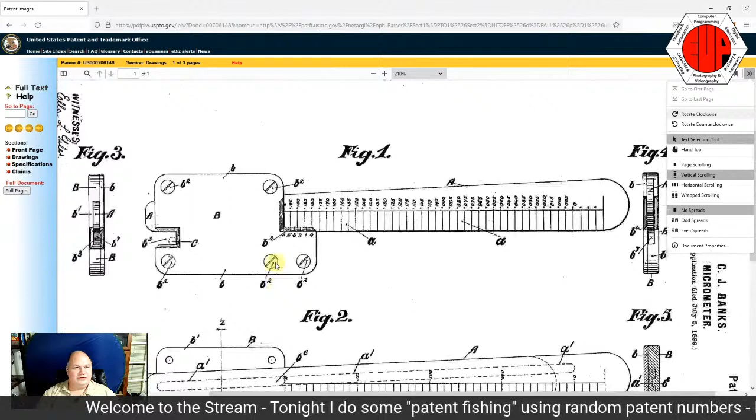Got your various 10,000ths, your metal spring to hold things in place. So it's more of a depth micrometer, I guess, depending on the distance that this plate moves through, we get the distance measured in that direction. It's a very special purpose as a micrometer goes.

Micrometers are instruments for gauging certain sizes of small objects. Generally used at present are of a screw type. Disadvantages of screw types—clearly there weren't too many disadvantages. They still are. The screw types are certainly still around.

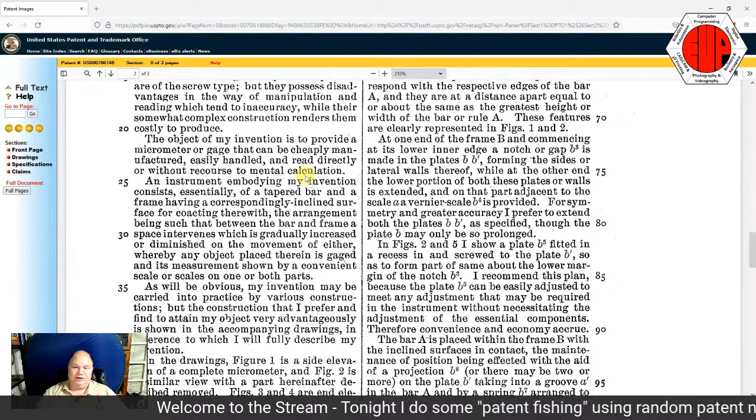Costly to produce, so many patents are because I want to make it cheaper. Cheaply manufactured, easily handled, and read directly without recourse to mental calculation. This is because when you look at a screw type micrometer, there's usually you have to add up several different gauge readings and then do a little bit of mental calculation to figure out where you left your decimal point. Tapered bar and frame—so that's his primary claim, is the other micrometers are hard to read and they're expensive to produce.

Yeah, so not very complicated machine. I don't know, this might actually be something 3D printable too. I don't know, that'd be terribly useful. Yeah, we'll save it aside. Maybe we'll make this.

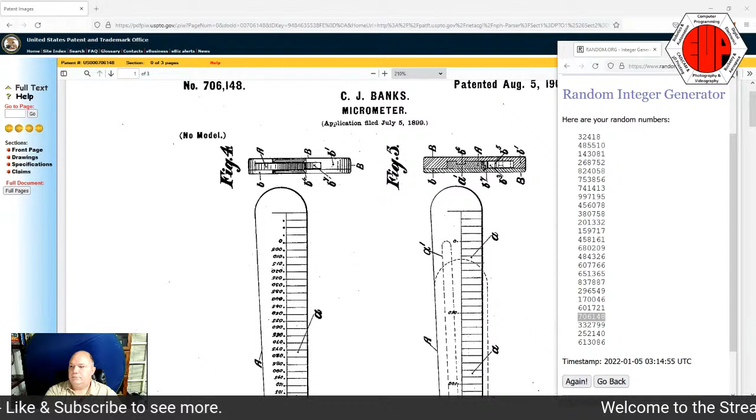All right, only 3 left, folks. Don't worry, it won't be long. I don't know if there's anyone here waiting for the end, except for my wife, who's ready to eat dinner. But we wanted to get through these 25, see what we find.

Ooh, method of securing a bosom to a shirt body. Oh my. Oh, that looks like very long and thin bosoms. All right, let's get the full document. Come on, what is this? Method of securing a bosom to a shirt body.

So, sort of a bra? Sort of a built-in bra? Underwear bra? I don't know, but those cups look wrong. Unless that's all just reinforcement stays.

Improvement in shirts in which the bosom has a loose border or edge fly, and that the hole in the rear surface forms the rear layer of the bosom. Produce a shirt with the bosom neatly and durably finished and attached to the shirt. Bosom? Am I reading that right? Is that not what I used to think it was?

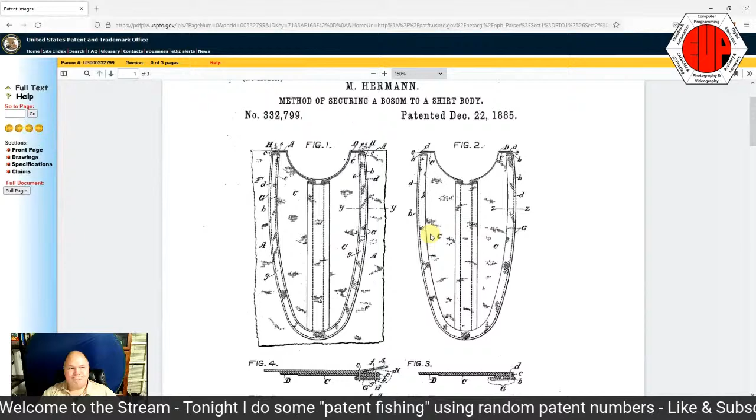I'm not sure. A lot of detail on the stitching. All right, well, moving on.

Let's see what we got. A cigarette holder. Oh, well, that's a fairly straightforward looking cigarette holder. Oh, got to cut it out of a sheet of metal. So that's a piece of flat sheet.

All right, let's see the whole document, see what it's actually claiming here. Cigarette holder, cigar, Gabriel Rodriguez of Cuba. Improvements related to cigarette holders made collapsible in order that they shall retain their contents in good condition at all times. Made waterproof, exclude dampness, that was always necessary. Furnish inexpensive holders of substantial character. Consists of novel features.

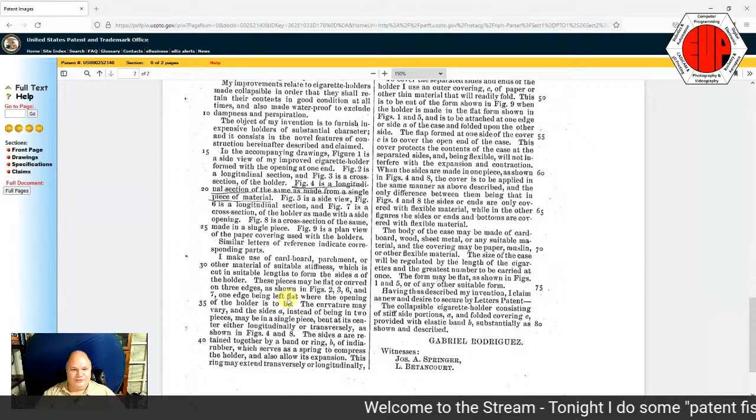Various accompanying drawings. Make use of cardboard, parchment, or other material of suitable stiffness, which is cut in suitable lengths to form the sides of the holder. So the cigarette box, I guess. And various of the flap formed on the outer cover to cover the open end.

Cardboard, wood, sheet metal. Covering may be paper, muslin, or flexible material. The size of the case will be regulated by the length of the cigarettes and the greatest number to be carried at once. I don't know, I guess no one had standardized the cigarette pack to 20 of them or whatever, I suppose.

Alrighty, moving on. Here's our last one for the evening, folks. If any of you are here or come back again, I'll probably do this again just for giggles.

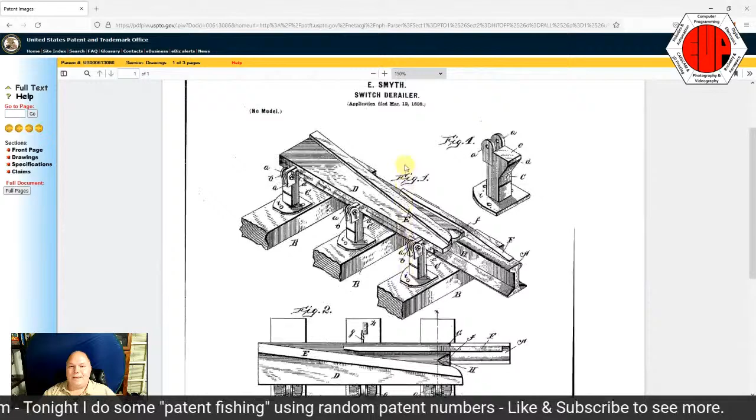Let's see, 613,000, 1898. What do you bet? Trains. Could be anything. Here we go. It's a switch derailer for trains. What a surprise. All right, well, we won't get too far into this because I'm not that much into trains.